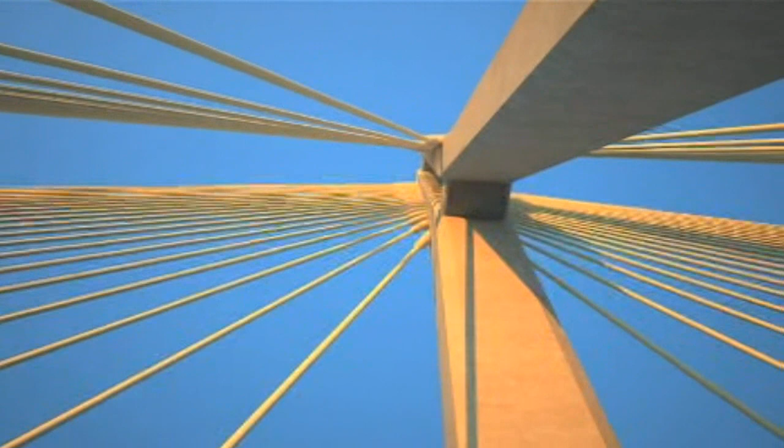The sea route of our dreams. The coastal road of Busan is about to be open, connecting the east and west of Busan. The new gateway of North Harbor, Bukhang Bridge, is being built, putting the final touch to the Busan Coastal Beltway. Bukhang Bridge will become the pride of Busan Port and open another future for the beautiful international maritime city of Busan.

Korea's leading port city, the maritime city of Busan. Busan, which handles 12 million TEU of logistics a year, is making rapid growth with vast facility expansions to become the hub port of Northeast Asia. In addition, extension of the road network is a must for providing smooth transportation for the logistics.

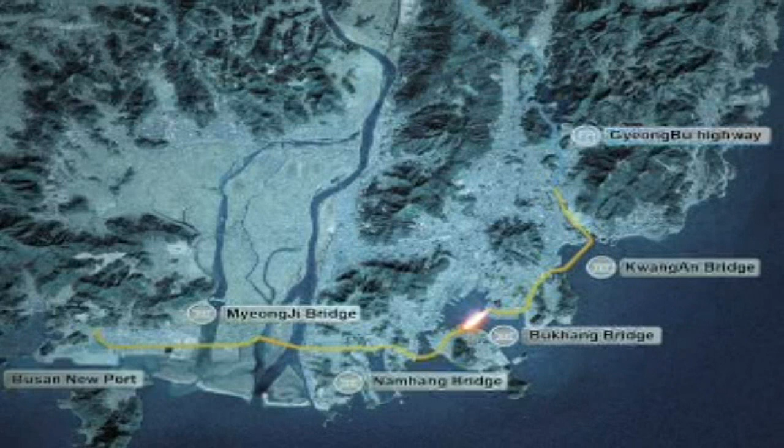In 1994, Busan began to construct the Coastal Beltway, connecting the east and west of Busan's waterside. The Coastal Beltway, which passes by Busan New Port, South Port, North Port, Haeundae Tourism District, and finally connects to Gyeongbu Highway, will be completed in 2011, along with the construction of Bukhang Bridge. Bukhang Bridge will put the finishing touch to the Coastal Beltway. Let's take a look at its grandeur and beauty.

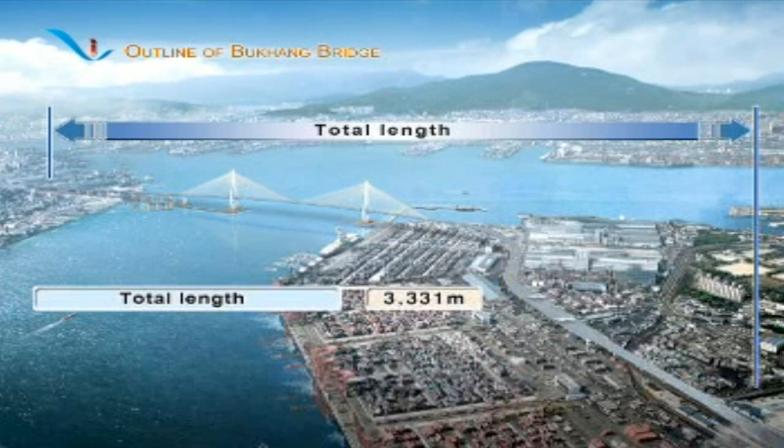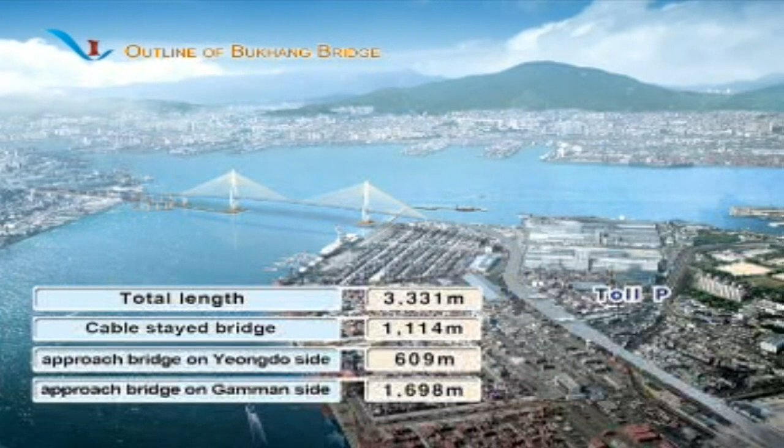Bukhang Bridge connecting Cheonghak-dong, Yeongdo-gu, and Gamman-dong, Nam-gu of Busan has a total length of 3,331 meters and consists of a 1,114-meter six-lane cable-stayed bridge passing through North Harbor, a 609-meter approaching bridge to Yeongdo, and a 1,698-meter approaching bridge to Gamman-dong. The toll booths will be located at the Gamman-dong side.

Bukhang Bridge, which will be constructed as one of the world's longest cable-stayed bridges, will be compared to the Rion-Antirion Bridge of Greece and the Yangpu Bridge of China, built with Hyundai Development Company's technology, and become the landmark of the Busan port for its grandeur and beauty.

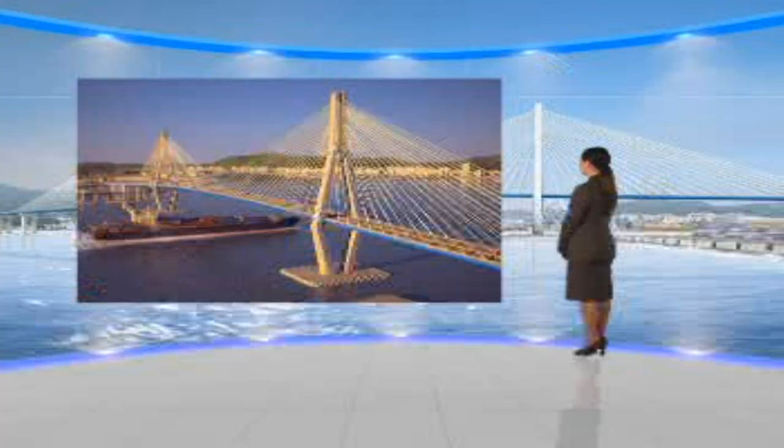Bukhang Bridge will span the #1 sea route, where not only do large ships sail more often than any other routes in Busan, but also container carriers of 100,000-ton class do. It is also frequently targeted by typhoons in summers, which means the bridge has to be wide and high enough for large ships to pass underneath it safely, while being strong enough to withstand wind and vibration. So, how is Bukhang Bridge able to ensure structural safety under such conditions?

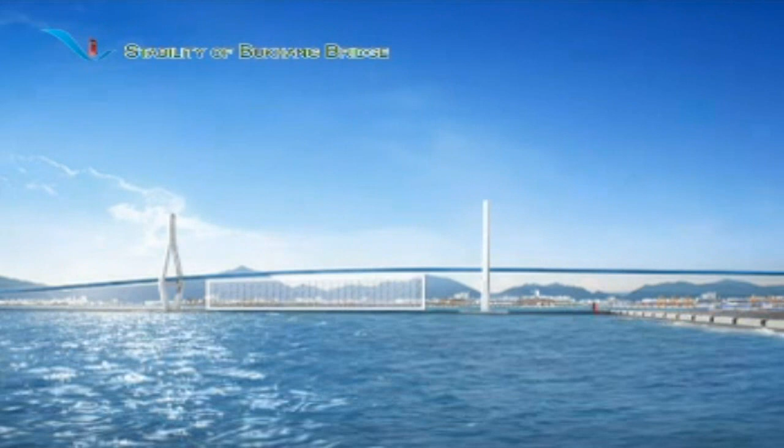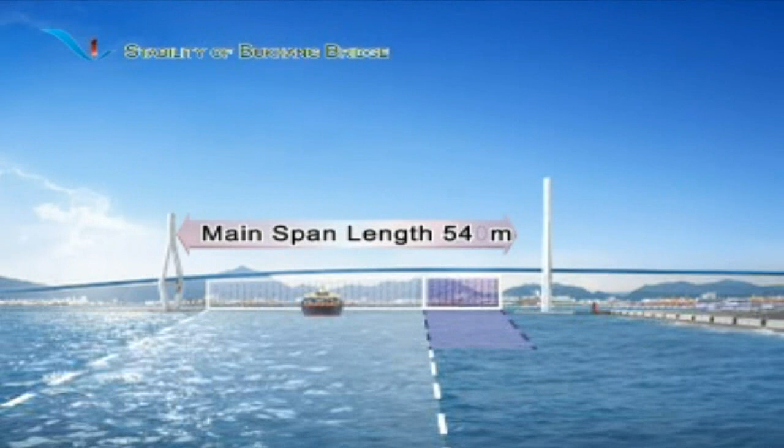Considering the trend of enlarging sizes of commercial ships as well as the size of today's ultra-large ships, Bukhang Bridge was designed with a 60-meter clearance from the water surface to the bridge and a span of 540 meters, which is well beyond the design requirement, 350 meters span length, to secure safe and abundant space.

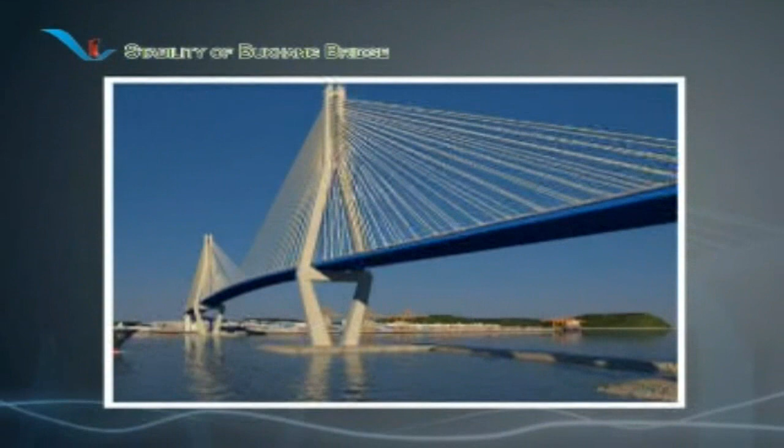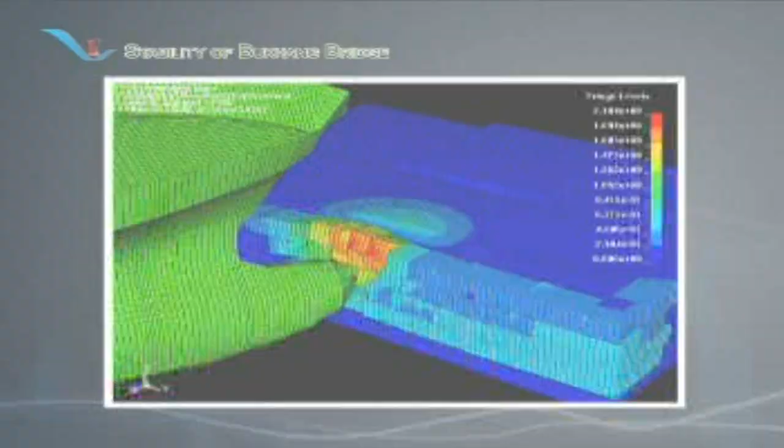Even if a ship sails off its route and collides with the bridge due to unforeseen malfunctions, the island-type bridge protection system at the bottom of the pylon protects the bridge and prevents secondary damage such as sinking of the ship. Furthermore, Bukhang Bridge secured structural safety against strong wind and typhoons with the help of the following three ways.

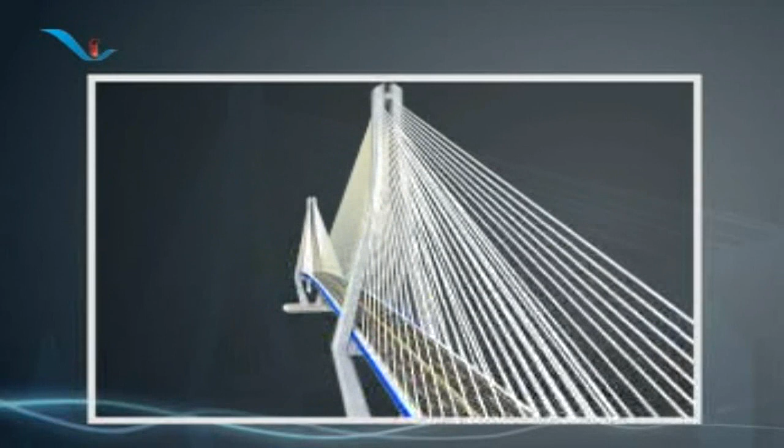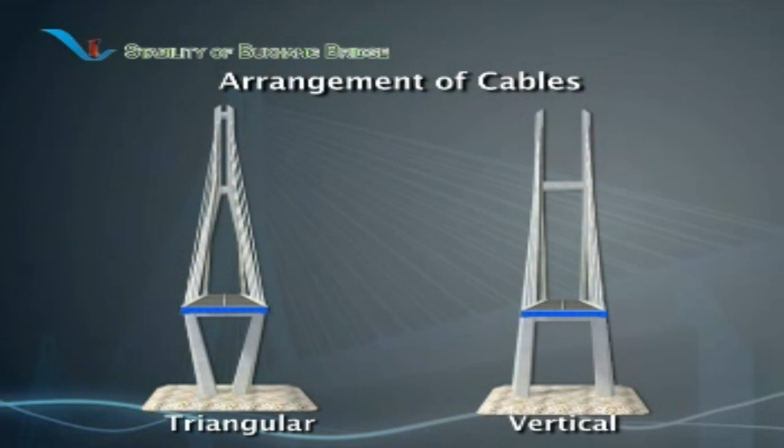First, the pylons are designed in a diamond shape. This makes it possible to arrange the cables in a triangular figure and minimizes the lateral displacement of main girders due to horizontal wind pressure and improves wind resistance. Secondly, the bridge is equipped with parallel wire strand type cable, which has a smaller surface influenced by the wind. It thus reduces the wind pressure by 25%.

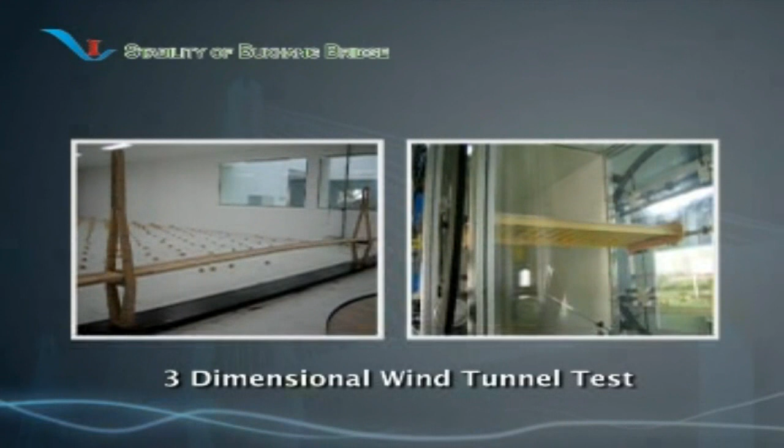Thirdly, a fairing system is to be installed in the main span of the cable-stayed bridge to withstand wind at a maximum speed of 80 meters per second, judging from the results of wind tunnel tests and numerical simulations. By doing so, the bridge will be so built as to be able to prevent vibration by wind that can cause fatal damage.

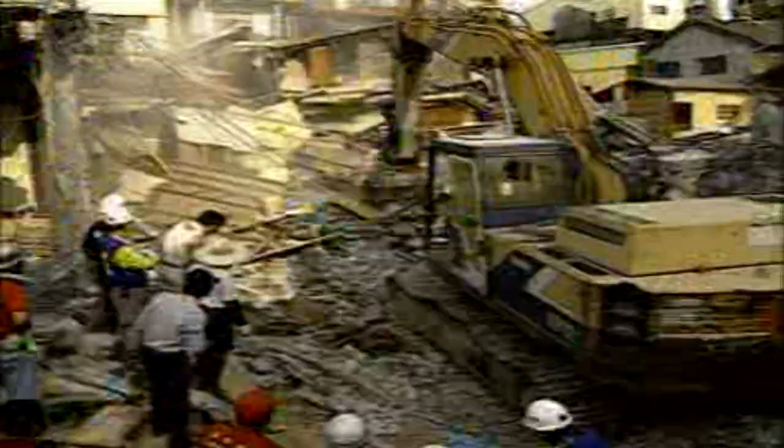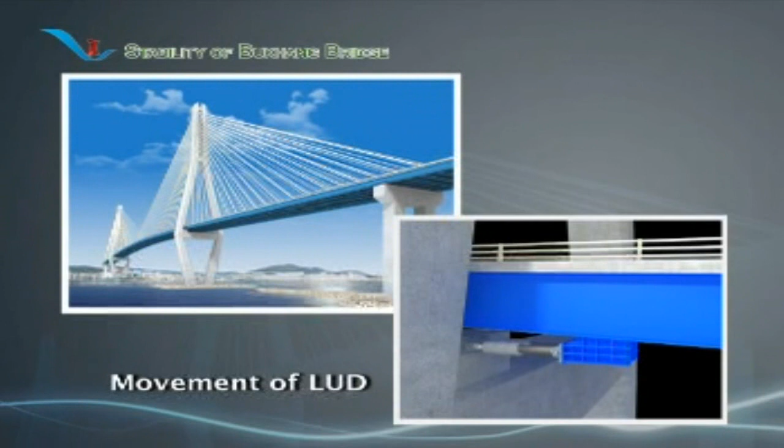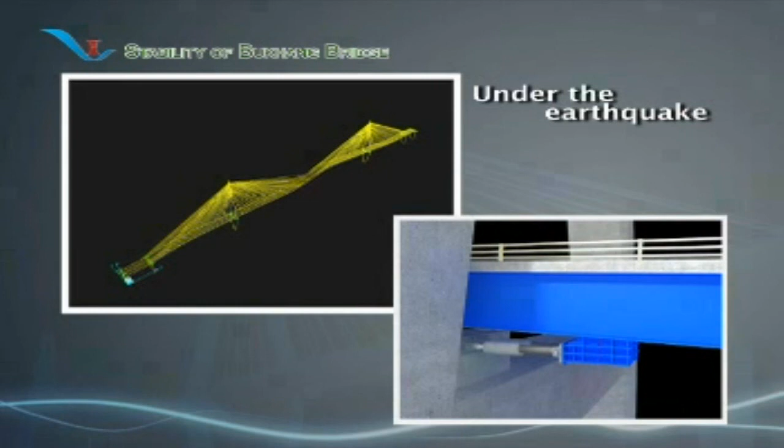Bukhang Bridge is also designed to withstand earthquakes as well as typhoons. For that intention, lock-up devices are to be installed at the connecting point between pylon and main girder. The lock-up devices work as an adjusting point for repetitive deck displacements caused by temperature change and wind, and work as a fixing point for sudden dynamic pressure such as earthquakes. By dividing the reaction from the earthquake into two or more points, it prevents the impact from being concentrated in a single point.

As for bridges built over the sea, safe and swift construction is just as important as structural safety after the construction. The construction of Bukhang Bridge will be quite challenging because of the safety for the frequent passage of ships under the bridge during construction. The construction of Bukhang Bridge will be a good opportunity to demonstrate how much Korea's bridge construction technologies have improved.

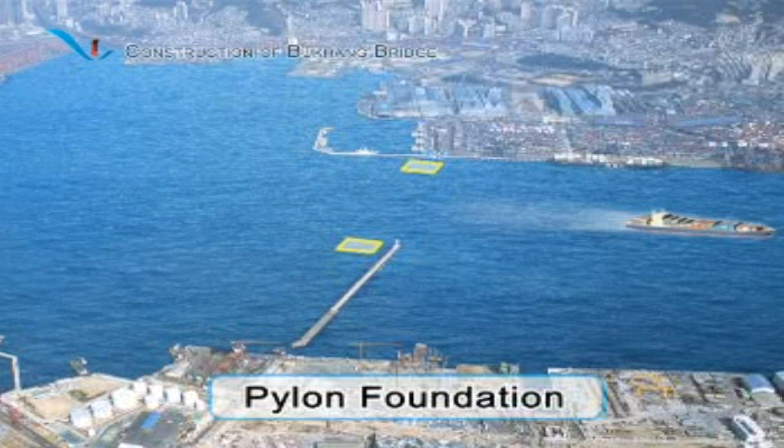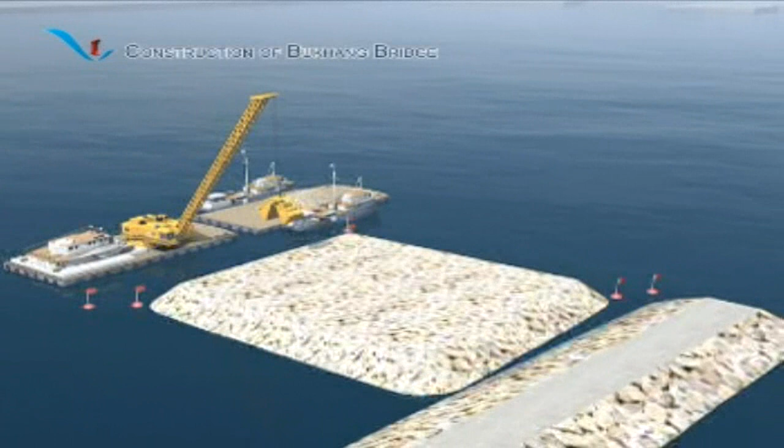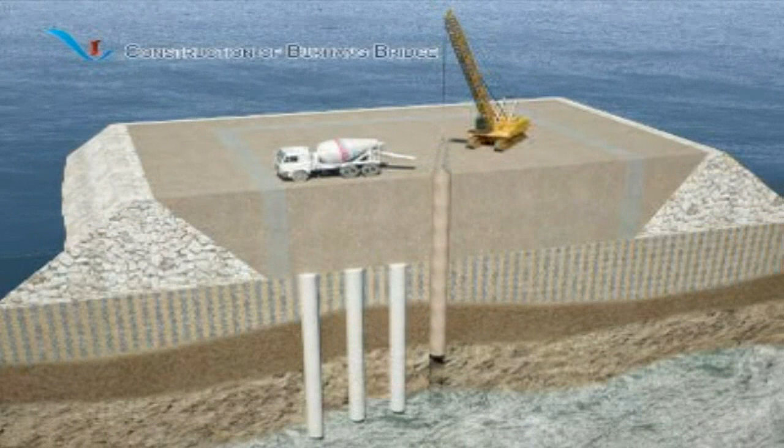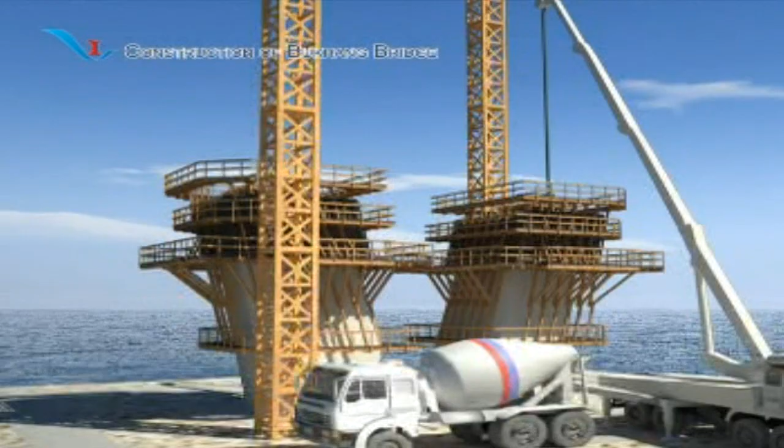Construction of pylons is planned to be done on land, not to interrupt the passage of the ships through the navigational route. Sand and pebbles are first applied to embank an artificial island, and then a slurry wall is constructed with the sequence of excavation by hydrofraise, insertion of rebar cage and concrete pouring. After that, in-situ concrete piles with 2.5 meter diameter are to be installed. Lower leg of the pylon is constructed by raising up climbing form.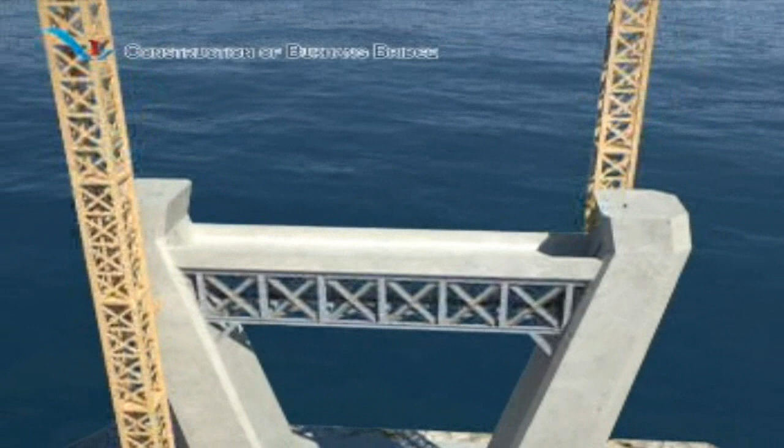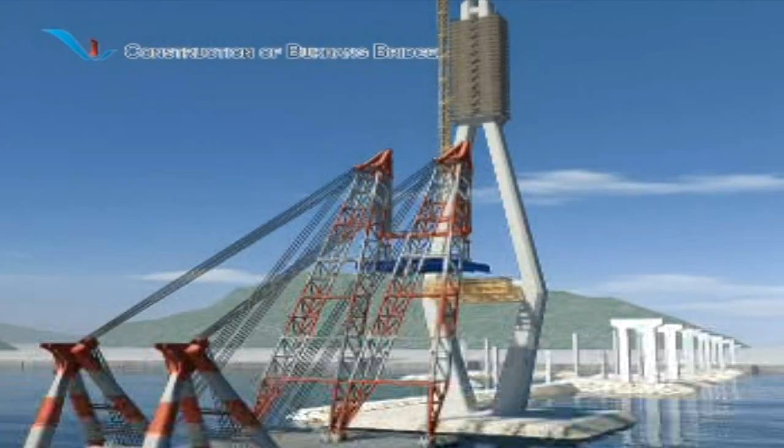For the construction of cross beam of pylon, supporting temporary truss and steel form will be first erected. After concrete pouring and sufficient curing, pre-stressing of internal tendons will be carried out. Subsequently, upper legs of pylon will be built by lifting auto-climbing form by 4 meters per lift. After pylons are completed, pier tables weighing 1,500 tons each will be installed using a 3,000-ton class floating crane.

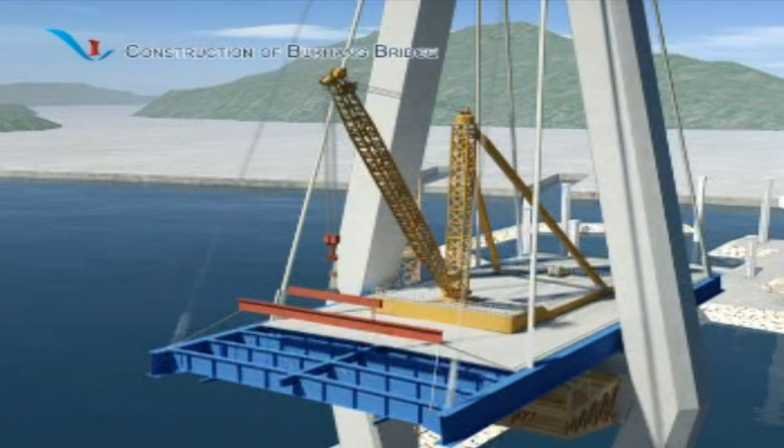Then 12.9-meter blocks of main girder will be erected using a derrick crane, and cables will be installed in repeated process. After the cable installation, precast concrete panels which are prefabricated on the ground will be installed on the main girders. It should be noted that all of the precast panels are lifted at the end of side span, not at the end of main span, in order to reduce interference with the ships in the navigation channel. After lifting precast panels at the end of side span, they are transported on the deck to the end of main span and installed. Repeating the process of lifting main girder blocks and installing cables, the whole superstructure will be closed.

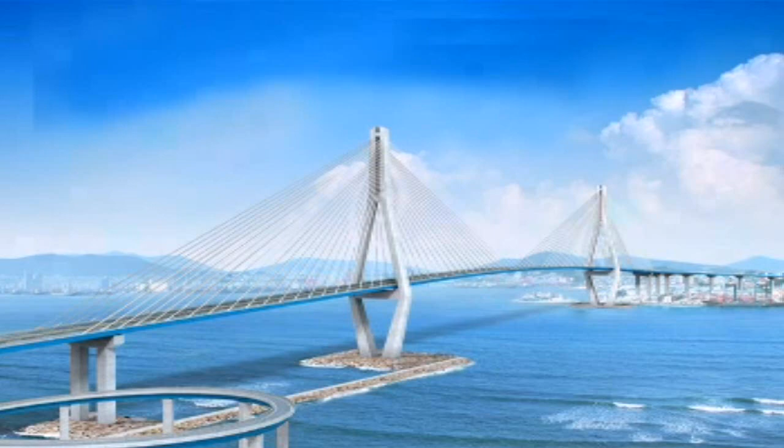The cables that stretch down from the diamond-shaped pylon and the arc silhouette of the bridge create magnificent scenery with a beautiful view of Busan Port. The evening view of Bukhang Bridge will present another beautiful view with magnificent lighting. What do you think? Do you see the future of Bukhang Bridge?

By completing Bukhang Bridge and the coastal beltway, Busan will firm up its stand as one of the world's most international and advanced maritime cities, and as Northeast Asia's logistics center of the 21st century. The day when Busan's coasts are connected as one. Another great future will unveil itself before us.

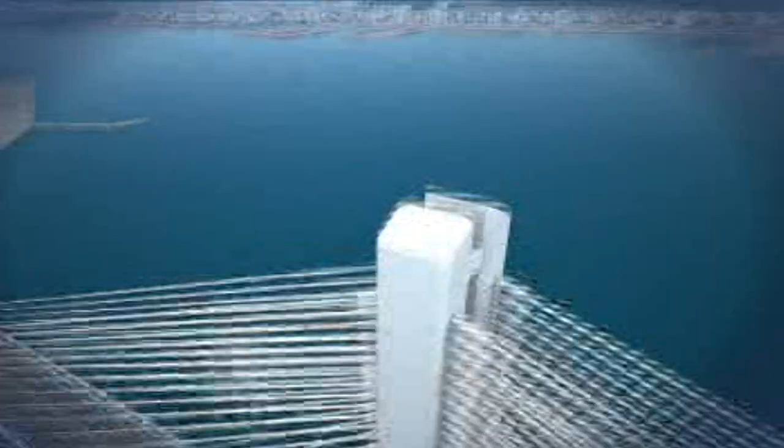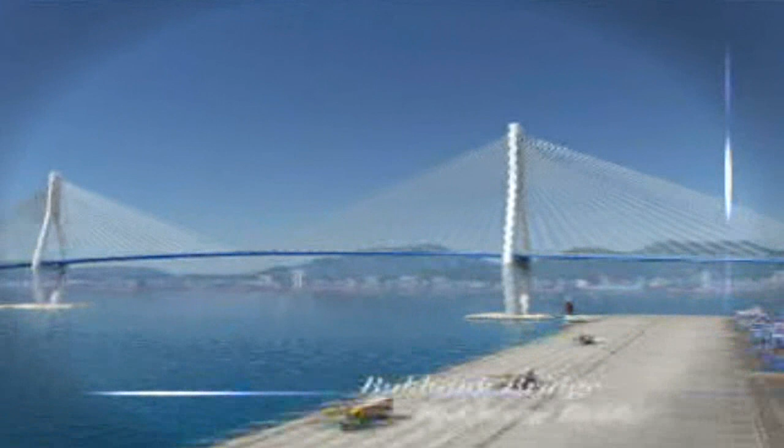One of the world's longest cable-stayed bridges. The new landmark of Busan Port that demonstrates the growth of Korea's bridge construction technologies. The final touch of Busan's coastal beltway. Even without these descriptions, Bukhang Bridge itself will be the new history of Busan by its very existence.